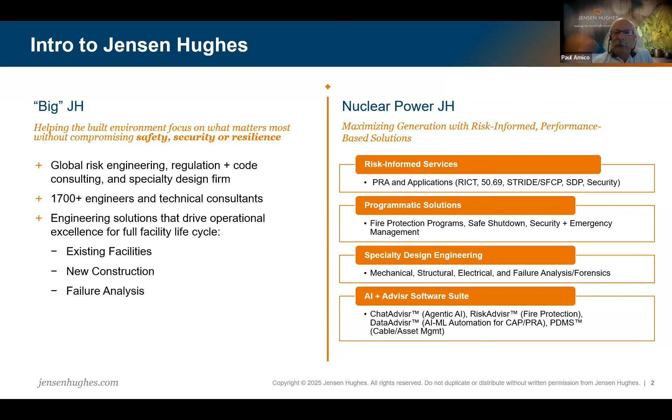And as Prasad was saying, we're trying to find other and better ways to achieve the intent of the codes and standards rather than just going and blindly meeting them. So we want to be purposeful and efficient in ensuring regulatory compliance and risk reduction with respect to safety, security, and operational resilience. So that's a little bit about the company. You can see some of the things we do.

So what's driving there being a lot of interest in this now, in this whole concept of risk-informed performance-based design? And who's really driving it? What we've seen in our discussions is it's really the off-takers that are driving this. It's the Amazons and the Microsofts and the Dows and those people. They're the ones driving this because they need to have energy supplies that are reliable.

A lot of these data centers want to be behind the meter. If they have an issue with availability or capacity factor, they've got to buy replacement power, and it can be very expensive. For Dow, if it goes down and they lose their steam, they've got to generate steam and fire up some of their old oil-fired or gas-fired plants. This is very important to them.

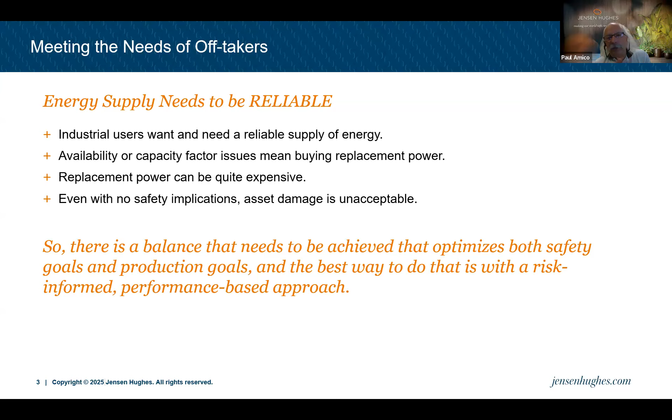They're not worried about safety -- I don't mean they don't care, they're just not worried, we've sold that. They look at this and they are convinced nuclear is safe, convinced it's low carbon, convinced it's good for the environment. What they're not convinced of yet is whether they can get the kind of reliability they need if they're going to invest in these as their energy source. So there needs to be a balance that optimizes both the safety goals and the production goals, and a risk-informed performance-based approach is really the best way to do that.

The principle behind it here, one of these is from an EPRI document, one is from an NEI document. What's been found, and these are relatively recent documents from 5, 6, 7 years ago, is that as safety has improved and risk has gone down, capacity factors have gone up. So what's been determined in the NEI document is this nexus between safety and operations: a plant that operates better is also safer. There's a direct correlation between being safe and being good in operation.

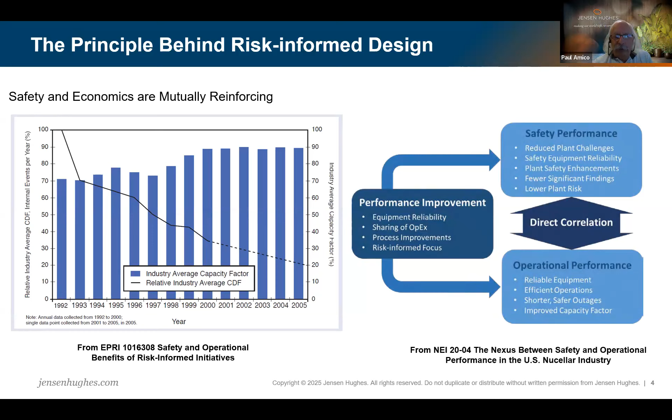So what do you need to do if you're going to use this particular approach? The first step is to establish performance goals, and the first type we're going to talk about is quantitative performance goals. You need a balance between safety and productivity when doing that. The starting point is to establish it for both at the plant level. We've traditionally used core damage frequency and large early release for light water reactors as the typical safety goal. For more advanced reactors, we're looking at other things. Availability factor and capacity factor are typical productivity performance goals.

We want to provide this match between the plant level goals and the design process, and to do that we use two tools. One is PRA, which I'm sure everyone on this call knows about. The other is something called generation risk assessment. These are used to allocate the goals at a lower level, basically at the function, system, and component level. The level of the goal will depend on the status of the design process, and we'll get a little more into that soon.

The other thing is that not all goals are quantitative. There really do need to be qualitative safety and production goals. They have their place. Although they're qualitative, in our minds they're still probabilistic. The goals themselves are risk-informed, based on an understanding of their value in risk space. But there are things that really don't fit into this quantitative modeling.

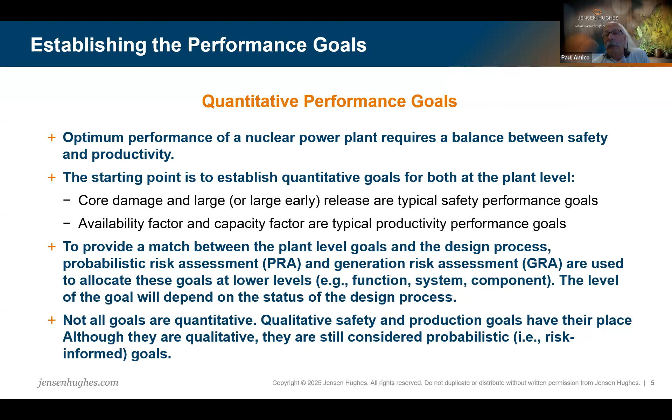So qualitative performance goals are related to specific functional, operational features that have proven over time, because we've done risk studies on them, that they have associated with them an acceptable level of performance. In order to use a qualitative goal, it has to be clearly stated in an unambiguous manner - this is what you need to achieve, not necessarily how, but what. They're related to all these different aspects of the design: physical design, functional design, all the administrative features, and you have to be able to measure and verify them by inspection, testing, or analysis.

Some of them do, in fact, imply certain likelihoods of occurrence - the single failure criterion, right? You know that if you don't have a single failure, you are going to have a lower likelihood of occurrence. Functional diversity is lower than just having redundancy. Alternate operating modes are ways in which you can compensate for a functional deficiency in one area by doing something else. Physical separation, equipment redundancy, and then functional backup - a different way to perform the same function. So the point here is that although these are qualitative goals, they are known from our experience to reduce the probability of system and function failure.

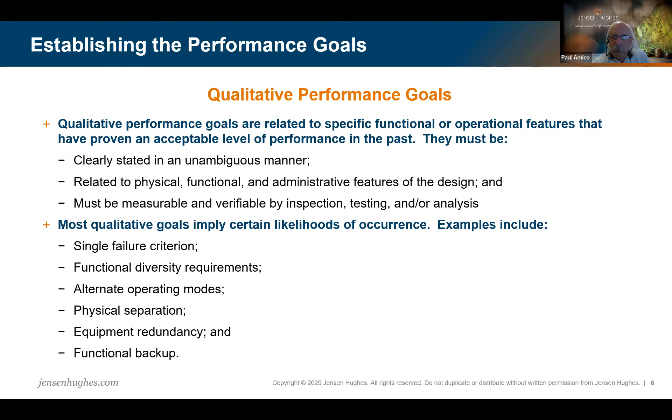So what's the process that we would go through? In order to strike that balance, you have to have a well thought out, risk-informed, performance-based design process. This particular flow chart shows the concept of how we approach this. What I'm going to do is break this down, and we're going to go through the different pieces and see how this process works. To start off with, we're going to design a plant to deterministic design criteria. It's not that we design to risk - we don't do a risk assessment and design the plant.

We have to start with something. So we're going to pick well-known, well-respected, well-used deterministic design criteria, and put together a baseline plant design to start from. Once we have that design, we can then look at it in a risk-informed, performance-based framework. So the next piece is to say, okay, I have a design and I have quantitative goals for both safety and for production.

We know from past experience that nuclear plants were designed very strictly to deterministic, restrictive criteria for many years. We started doing PRAs in the 70s, but really in earnest in the 90s, and we found out that just meeting deterministic design criteria didn't necessarily mean you were going to achieve your safety goals. We didn't really study the reliability side of it very much.

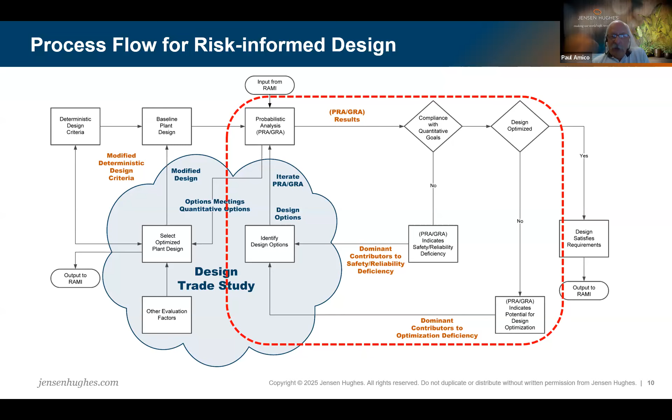Then I ask what I'm missing from an optimization standpoint. I identify design options again and start to do some of these trade studies. Let's look at that trade study section.

As I'm going through the inner loop and the outer loop, I look at options for how I can improve the plant. There are obviously various ways, and regardless of which loop you come from, you're going to have various options.

I look at these in both the quantitative and qualitative space, because I'm not working with just numbers. I can improve things, but if I'm not properly considering these other factors, that's a problem. So what are these other factors I consider?

There's cost—that is not something I'm putting in the PRA and the GRA, it's something that comes into my decision process. What about environmental issues? I'm not quantifying things like water usage and air and various things like that. What about any social issues that come into play?

Another piece is compliance with code standards and criteria. The question we ask is: when I'm looking at this optimization of the design, am I hitting my head against deterministic design criteria that are driving me to do something that maybe isn't optimal?

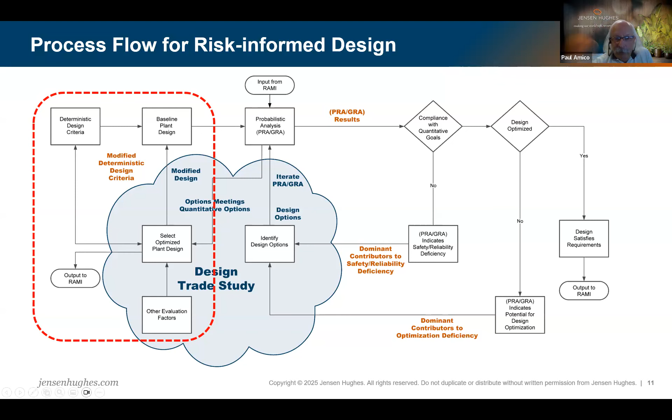So what's a GRA? This is the process where you estimate generation loss during plant operation. You're going to look at the probability, magnitude, and duration of plant trips or derates due to postulated equipment failure.

The GRA models potential generation and economic impact. We usually use something like megawatt hours per year. Again, cost is an issue, other things are an issue, but that's part of the other considerations when I'm talking about design trade studies.

So we're trying to look at it - it's still frequency, consequence, risk, same as we do in the PRA. It's much more robust than simplistic qualitative approaches, like single point vulnerability, because it's more holistic - in the same way PRA is more holistic than single failure criterion. GRA is more holistic because you can address redundancies, interdependencies, dependencies, diversity, etc., in the plant systems and components, and get an understanding of how they're helping you. It provides quantitative estimates to support decision making.

Just like in PRA, you get importance rankings, critical components in terms of production risk. It's important to note that the fault and event trees you develop for the PRA are also used in the GRA.

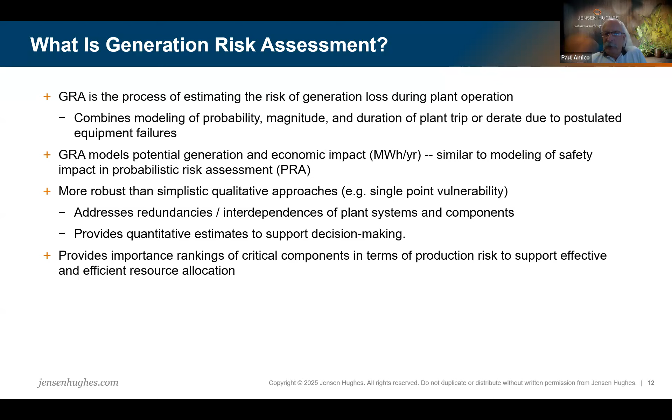Then you're going to have other input from various sources of planned unavailability, repair times, failure rates, restore times, and what the consequences are - what's the derate level - and you build this model. You have a trip/derate model and a calculator for that, the availability model.

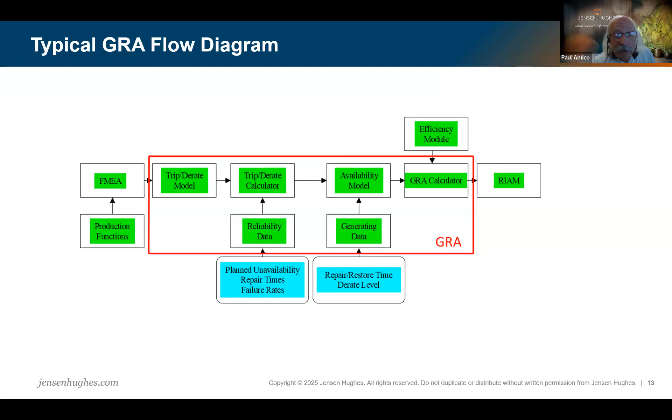You're going to look at this from the standpoint of efficiency, and then enter risk-informed asset management. We'll talk about a very important part of that coming up - RAMI: Reliability, Availability, Maintainability, Inspectability.

It's an integral element of the performance. In that flow chart I showed before, there were inputs and outputs from RAMI into the GRA and PRA process, because you have to have a program in order not just to be safe, but to produce power - an effective program for reliability, availability, maintainability, inspectability.

Notice these last two in particular are very important in the design process. Maintainability - how hard is it to get where I need to go to maintain something? I have to design that. Inspectability - how hard is it going to be to inspect something? I have to design that. So this process starts very early in the design process.

It's an integrated tool. You're focused on systems, structures and components. The big pictures, PRA, GRA, give me importance measures, and then it says, okay, what does that mean in terms of the design of the systems and specifications for the equipment, so I can set and monitor performance goals throughout the plant life cycle.

So the interface here with PRA and GRA is so you can set more aggressive goals for equipment and redundant equipment for those whose inability to perform the function results in increased safety risk or reduced operational capability. In production space, it's the same as in safety space - we want to put the resources in the right place.

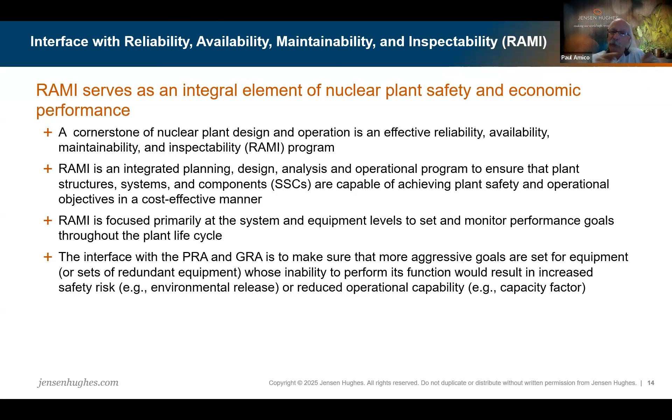There's 3 steps generally in the RAMI process. One is the qualitative evaluation, typically done using FMEA and answering the question: what are the possible component failures and their effects.

Now, there are other ways to do it. You can do single point vulnerability, reliability block diagram. I've used HAZOP, and in some cases that's actually more appropriate to use. You want to then talk about the outcome, which is the functional importance and inspection, monitoring, and preventative maintenance activities in that qualitative space.

Then there's the quantitative space, where we're using event and fault tree analysis. You want to ask, how does the failure of a component affect the system and the plant? So now we're taking it a little bit higher level, an overall perspective, so that you can get estimates of the key metrics for safety, interfacing with these PRA and GRA models.

These steps have been done for a long time. These particular RAMI steps go back to the 80s and 90s. What's changed is this last piece, this production analysis, and this is actually what's turned this into a much more powerful tool than it was before. It's relatively new, and it leverages computational advances in the methods and architecture since what was done in steps 1 and 2 were developed and applied.

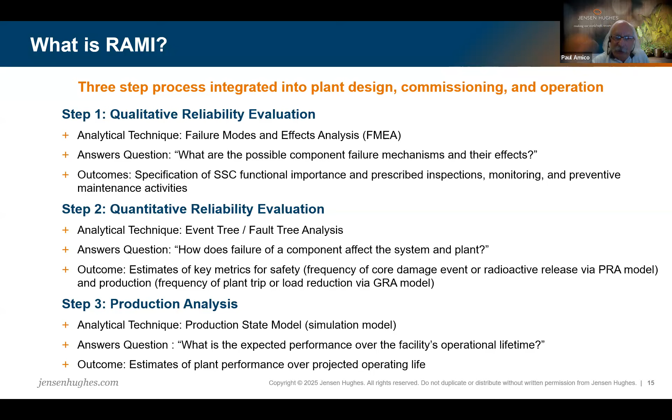We can do this because we got the computers and we got the codes to do it. It's a dynamic simulation model to facilitate decisions, not just for safety, but also business and economics over the life of the plant. At JENSEN HUGHES, we've applied this to a broad range of process facilities to support integrated asset management, risk-informed asset management from cradle to grave. So that's the new piece that in the past half a decade or a little bit more has really made this whole process of risk-informed performance-based design more than it used to be.

Behind it is what we call the state model. This is the simulation model. It's a dynamic simulation model, and it provides analysis of plant production over time. It includes provisions for equipment failures as well as planned maintenance, and it evaluates that.

It looks at, in a production setting, it accounts for the time a system or process may be idle, meaning that it's waiting for items fed from an earlier sub-process. That could be equipment, it could be any one of a number of things, supplies, etc. But it's helping you understand what the potential for a system or process being idle could affect the plant performance.

It's a statistical model. It samples from prescribed distributions, which may be based on data if available or expert judgment. I didn't mention expert judgment earlier. We understand these advanced reactors don't necessarily have data for all the equipment—maybe only 80% of the type of equipment that's in them, like buses and pumps and things we've had for a long time, but they also have some unique equipment. So you would use an expert judgment process in the design as you worked along, and you'd improve it as you worked along.

And it outputs the estimates of production over time with detailed statistical evaluations in support of investment decisions combined with econometric models. Application of the models in the early design phases will support development of robust and resilient designs that look at both economics and safety, because at this point in the process, it's easy and cheap to find the choke points and design them away. It's when you get further along that retrofits are expensive.

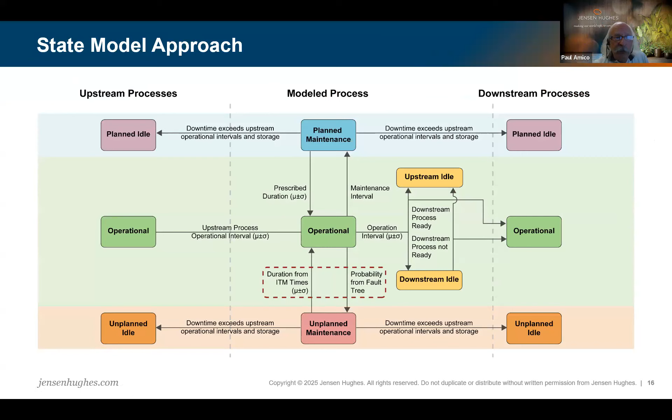We can go to 17. So it provides essential information to support decision making, including the classification of the functional importance of the plant's SSCs with respect to all of these aspects.

You can identify and prioritize actions that you can take to improve plant performance, areas where design changes would provide substantial benefits. Maintenance, specifying your predictive, preventive, and condition-based maintenance in order to achieve these goals for the SSCs. Identification and evaluation of alternatives to enhance the economics, minimize the cost.

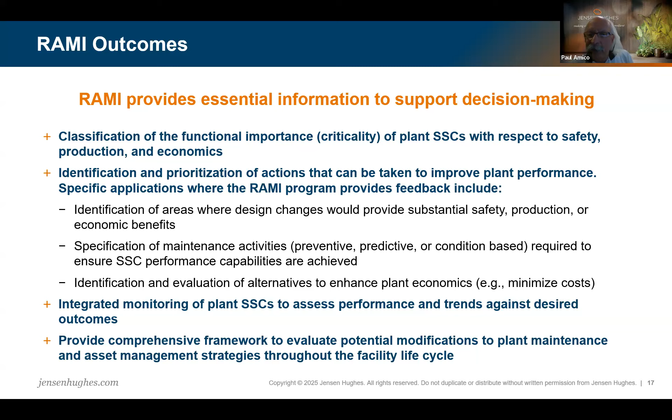And the integrated monitoring process makes sure that you don't stop doing this when you're finished with the design and construction—you continue to carry this through the life cycle of the plant. You have this framework to look at modifications to asset management, to plant maintenance, et cetera, throughout the cycle. So the bottom line is it provides information to decision makers to support informed decisions that consider all the various objectives of all the various stakeholders.

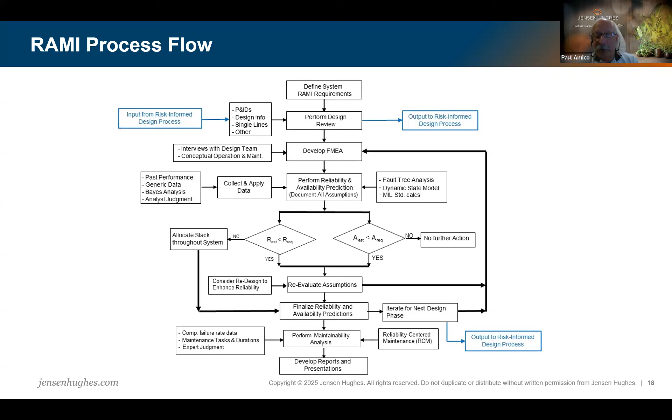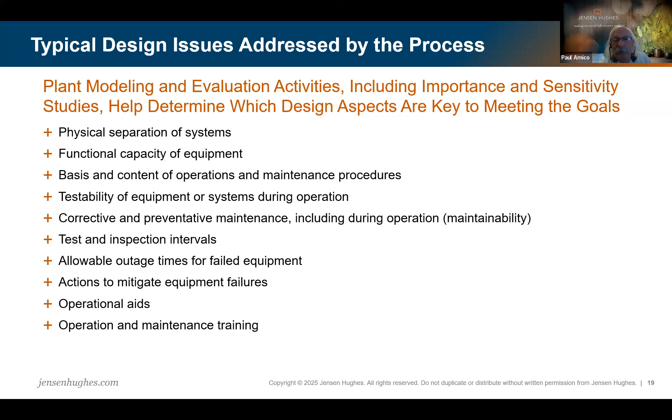Okay, Pat, am I still here? Yes, we're on slide 20. Yep, okay, let's move to slide 20. Right, okay.

So the overall approach, then—the basis for design assessments and decisions of the plant models. I said I would come back to this. The keys to successful application are that you need a structure that provides useful output as the design evolves.

So you're going to integrate the modeling activities into the design process to keep pace with the design at the decision points. Use the automated computer tools—PRA, GRA, RAMI tools—to allow for easy iteration and look at the addressable parameters in the design decision process.

Am I updating it every day? No. Am I updating it every 6 months? No, not either, okay? There has to be a cadence, and as you reach certain points you've added, you say, I think this is something we need to look at, and we need to understand if we're headed in the right direction.

It's important that they only reflect what's known at a given point in the design process. So they'll start out being simple and gain detail as the design process continues. The decision at each point in the process will focus on the aspects of the design that are most difficult to change as the design evolves.

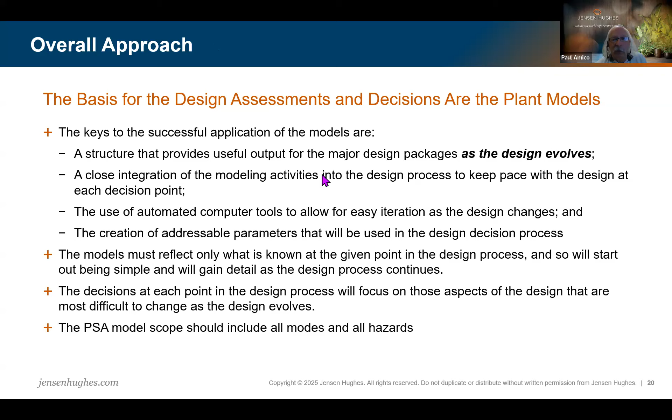The next slide talks a bit more about the model scope. So all modes, all hazards for the PRA. The GRA model needs to address all the ways in which capacity factor can be lost. This is the additional modeling I talked about earlier where it comes into play. You can't use initiating event frequencies—you need to model the systems that lead to the initiating event so you can design to meet the production goals.

You need to look at the planned outages and how the plant can make these outages more efficient through things like fuel handling, equipment overhaul, maintainability—right, when I talked about maintainability of major equipment.

You need to look at the unplanned outages, which effectively are the OK sequences in the PRA. You have to model all the normally operating systems as shown here—primary cooling, secondary cooling, water cleanup—anything whose failure can result in a shutdown or a derate.

And then the administrative shutdowns, which is that interface between safety and production, where a regulation from the NRC says if you get into this situation you need to shut down. We want to remember that a safe plant is an efficient and reliable plant.

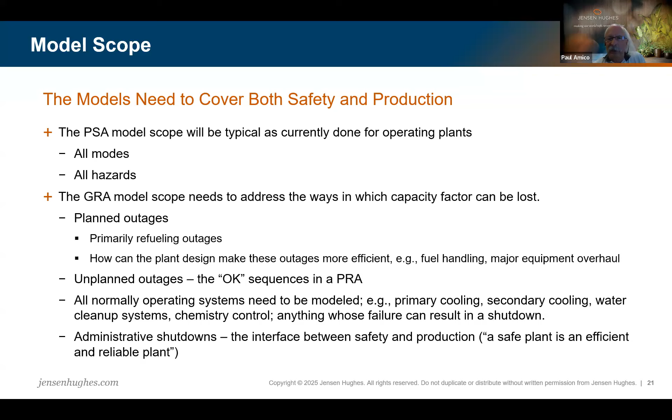So we'll go to the next slide. The model will evolve through the process. I've roughly listed the design phases as a concept, but there's no really bright line. You don't magically go from completed conceptual design to completed preliminary design and learn nothing in between. It just doesn't work that way. In fact, different parts of the plant could be in different phases at any given point in time.

It may be that the NSSS system is more advanced, and you're going to submit that to the NRC soon. But maybe the system to provide process steam isn't quite as far along. So you need to think about the decisions you can make for different parts of the plant based on where they are in the design, and you're not making them all at one point in the phase.

I don't say, alright, I'm going from conceptual to preliminary design, I go take a nap, I relax, and when I get to preliminary design I make decisions. As I said, you don't update it every day, but you don't wait 6 months or 8 months either. You're going to ask yourself questions along the line. So this is just a rough concept laying out that you start early and you go through the entire process.

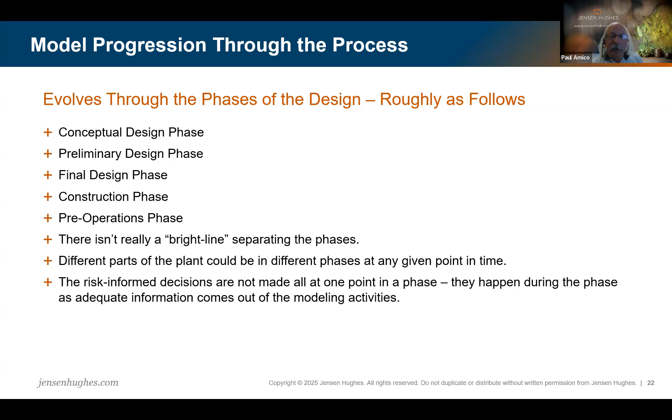Next slide: during each phase, the risk team is going to need to define what information is available and should be provided by the design team. They have to work together on this, they have to talk about where each part of the plant is in the design process, how far advanced it is, what kind of information can you give me, and then based on the information, what should be modeled.

We have thought this all out - there's a much longer presentation, like a 3 or 4 hour seminar on this, where we talk about what can be modeled, what level of detail you can model at each phase in the design. You don't want to get ahead of the design. You want to stick to what's known and assume only what fits into that known envelope.

How should you consider human factors and human actions, and what types of decisions can be supported given the state of the design? So this is my little line at the end that I always end with: there's a tendency to want to get more out of the PRA and the GRA, more out of the model than you really should. Then you're stretching it out, making assumptions you have no basis for. So my favorite line: don't torture the risk model until it screams for mercy and gives you what you want. Make sure you are doing what makes sense based on your understanding of where you are in the design process.

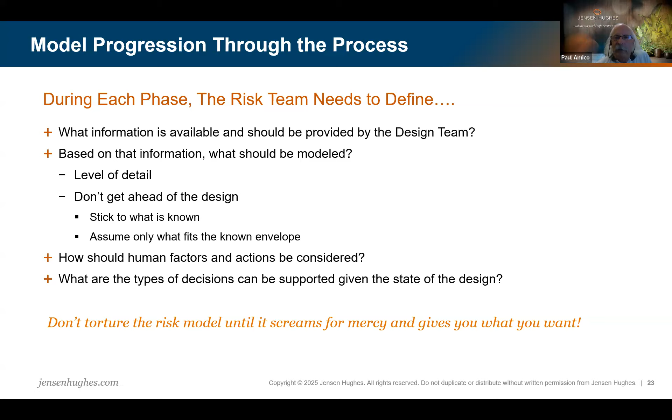So that's pretty much it. I'm just about where I wanted to be - I wanted to be about a quarter in, so I'm a little before that because I wanted to leave plenty of time for Q&A. But that's where we are now.

Well, I don't think it addresses it any better than a PRA does. Those would come under other considerations you have to look at, because as you know, even in PRA space we don't model intentional attacks on the plant, whether physical or otherwise. That's just something to put a probability on a bad actor - something I don't think anybody feels comfortable doing. So that's got to be handled in the more traditional way.

Okay, thanks. I was going to ask in general, how much augmentation or modification would you anticipate in order to accommodate incorporation of a more performance-based approach to security? I know the NRC has some new proposed alternative performance-based physical security requirements, but unless you wanted to add anything, I think how you specifically answered it for cybersecurity also just applies in general to security. Is that right?